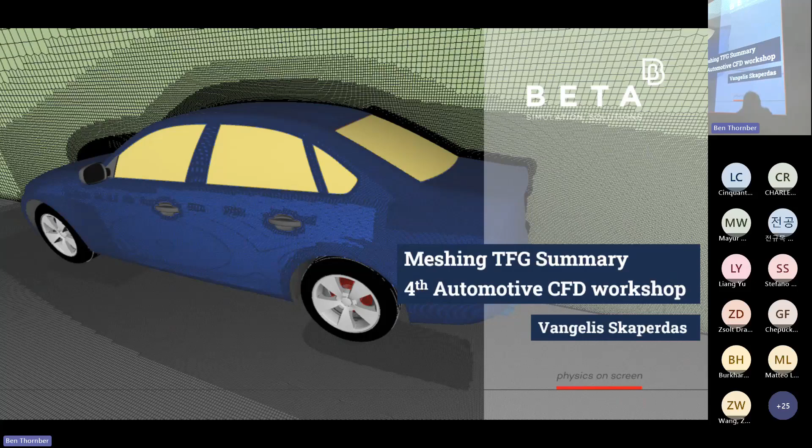I'm very excited to be here at the fourth Automotive CFD workshop taking place in a UK university, just like it started in 2019 at the University of Oxford. It brings me a lot of memories and flashbacks from my student life in the UK, so I'm very excited to be here.

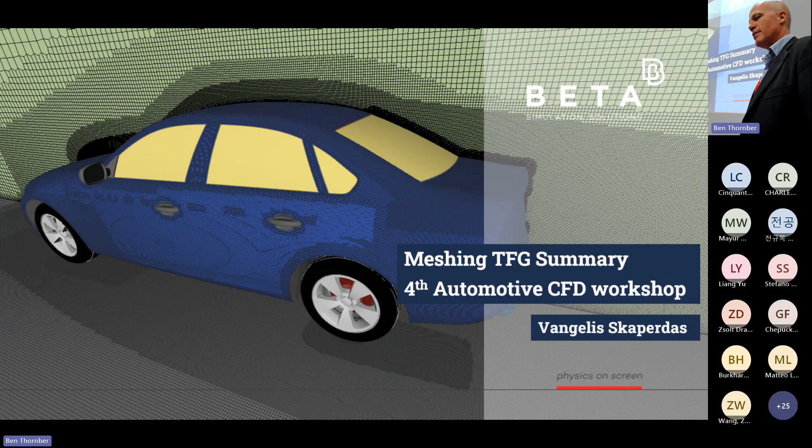So today I'm here to talk to you about the overview of the meshing TFG, and also about the committee meshes that we generated using ANSA. Disclaimer here, you probably know already that Beta is part of Cadence now. It's just that we didn't have time to get the correct PowerPoint templates. We will be given those in due time.

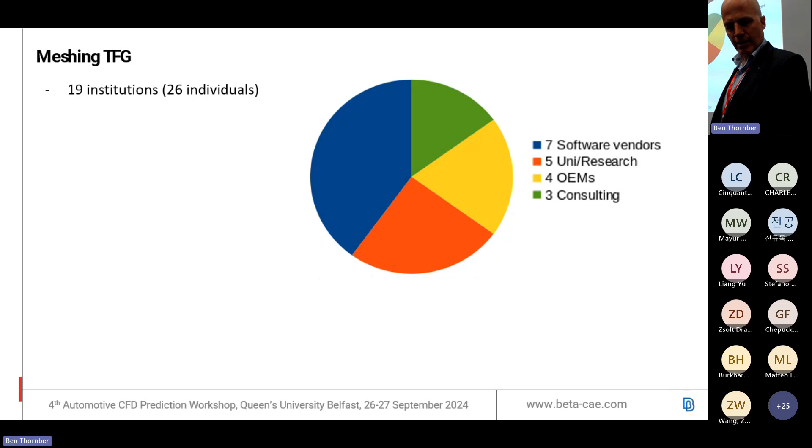So an overview of the meshing TFG. This is the number of participants, so a wide distribution over different fields - 26 individuals and 19 institutions. To be fair, I have to say these are all the people that just registered. The actual active participants were a bit less, but still they came from all over: software vendors, universities, OEMs, and consulting companies.

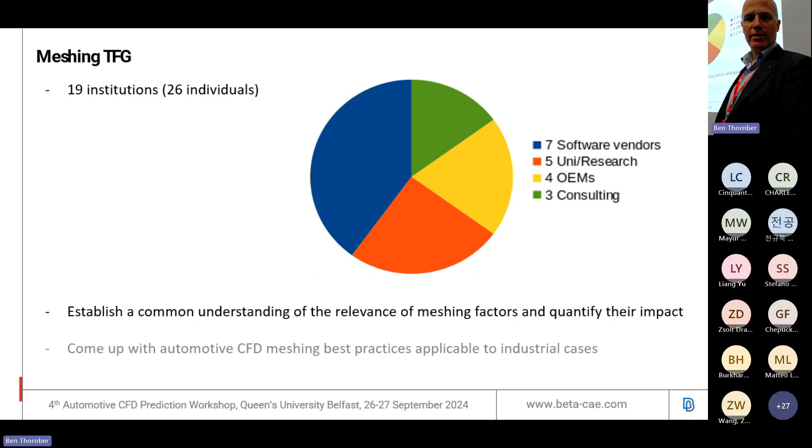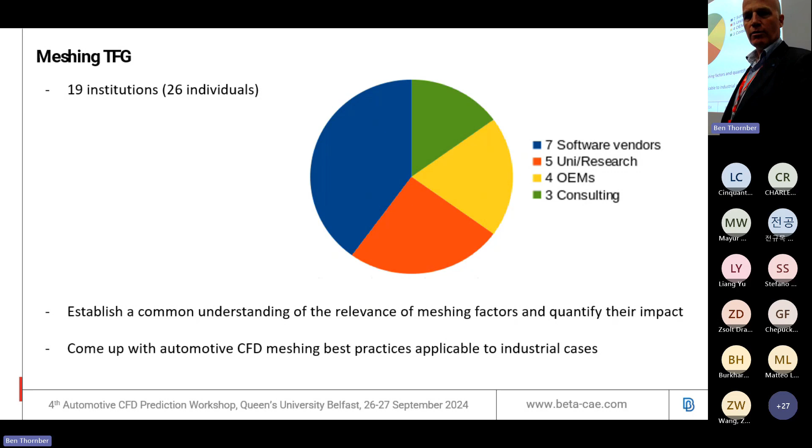The aim of the workshop was to establish a common understanding of the relevance of meshing factors and quantify their impact. This is a sentence that contains a lot of work, and I'm not here claiming that we showed the answers to all of these things. Once we did this, the purpose of this workshop is to come up with best practice for meshing that are applicable to industrial cases - this is the interest of the OEMs participating here.

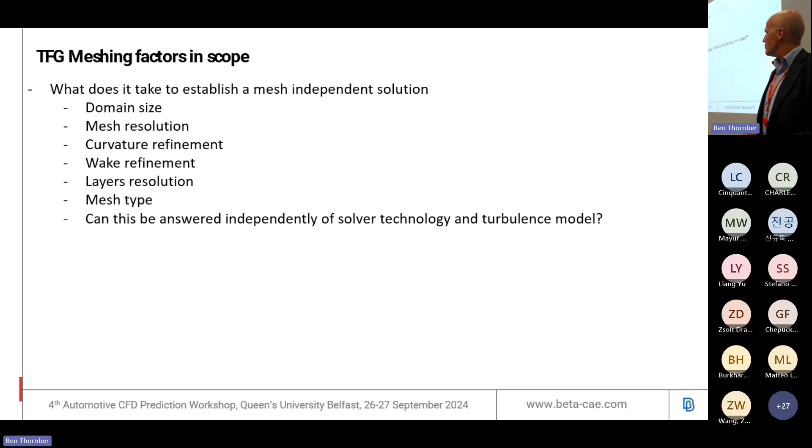Some of the topics discussed over the meetings, which took place every five weeks, included how to create a mesh-independent solution - features like domain size, mesh resolution, curvature refinement, wake refinement, layers, mesh type, polyhedral standard. And of course, is there a unique answer for all the problems? Probably not.

I also had in mind whether it was possible to create some sort of universal mesh quality criteria, because one of the challenges of creating the committee mesh is to make everybody happy. It's not easy because different CFD solvers have different peculiarities - different calculation of cell centers, face centers - and it's not always easy to have everyone happy. Another important topic, coupled with the noise TFG, was mesh consistency and repeatability, depending on the hardware, the actual geometry, and so on.

We also did additional work because the final meshes were polyhedral. In parallel, since some participants had solvers that used standard type meshes and high order meshes, we also generated some of these.

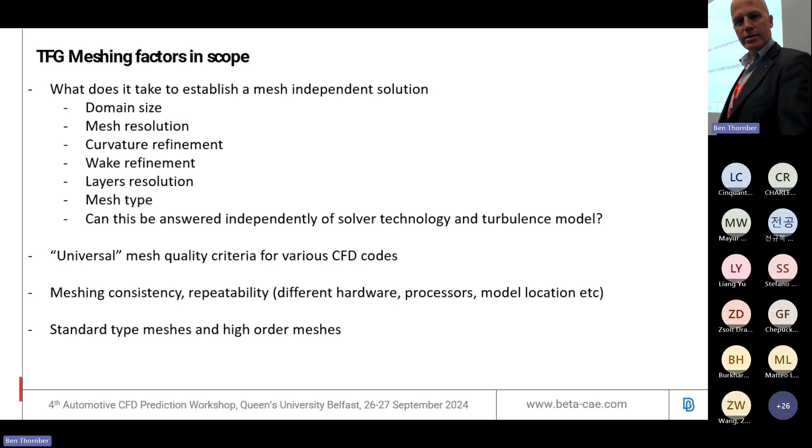Some questions that popped up in the meetings concerned the committee mesh, which is an octree mesh - the fact that it has this jump of cell size, one to eight in volume - and whether it causes any issues to hybrid RANS simulations. Some people discussed if we could have a coarser mesh, because there was only one mesh level refinement concluded from the previous workshop, but maybe that was a bit large in size.

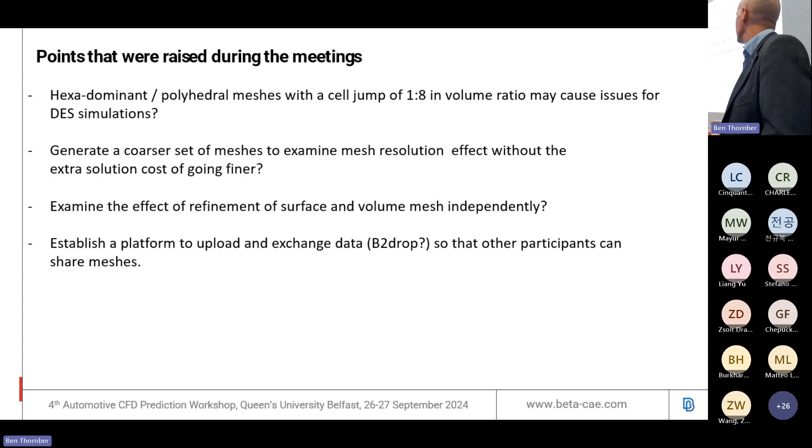We wanted also to examine the effect of changing the resolution separately on the surface and the volume, and see which one was most important. There was also a discussion on whether we could have a platform to exchange meshes so we could share some know-how. After all these discussions, there were bottlenecks.

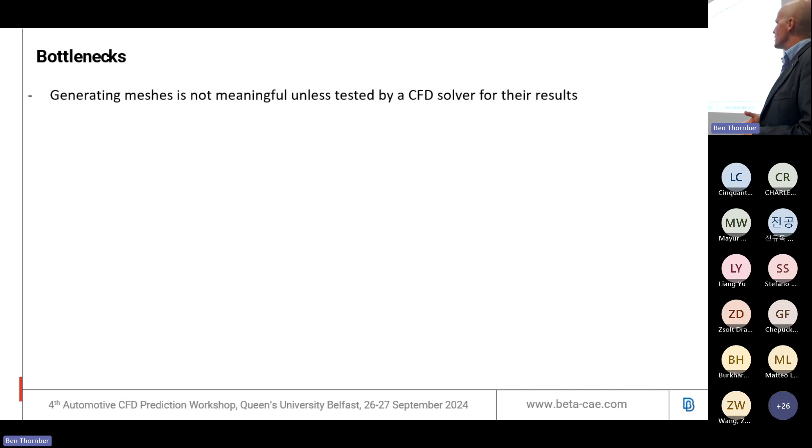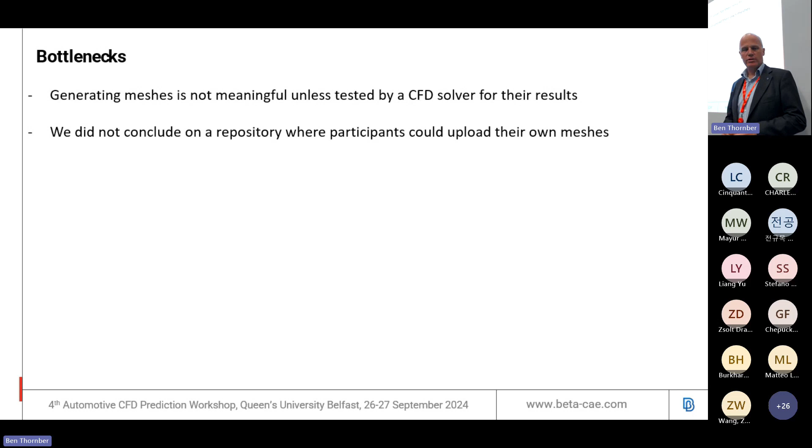One bottleneck is that generating meshes without solving them is useless, and it's always a matter of resources - everybody can generate a mesh, but somebody has to solve it and get some conclusions. Otherwise it's not useful. Everybody who has contributed actively in this workshop knows that this work is done overtime, in parallel to our everyday job. In the end, we didn't conclude on such a platform where we could share meshes and exchange know-how.

So the actual TFG outcome, I would say, is that we generated new committee meshes for cases 2A and 2B after very useful participant feedback, especially Burkhardt's team. I would also like to thank Miguel from Total Sim USA for his contribution.

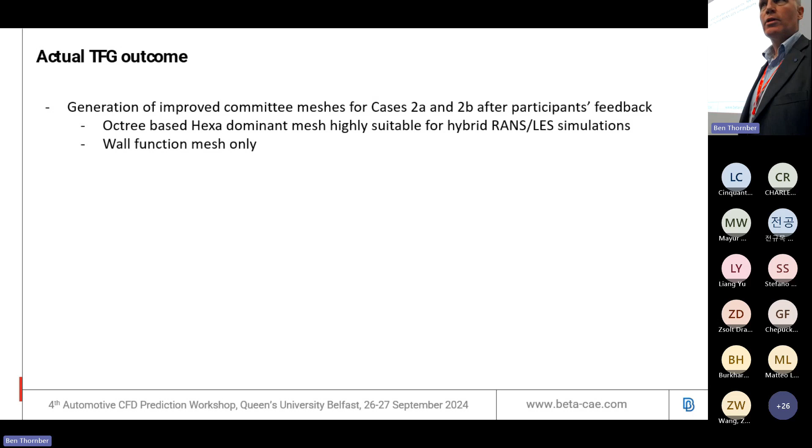These were, as I said, octree meshes, hex-dominant, highly suitable for hybrid RANS. Based on conclusions from previous workshops, we went only for wall function mesh because we saw there was no actual benefit to spending extra resources, and we output four mesh formats.

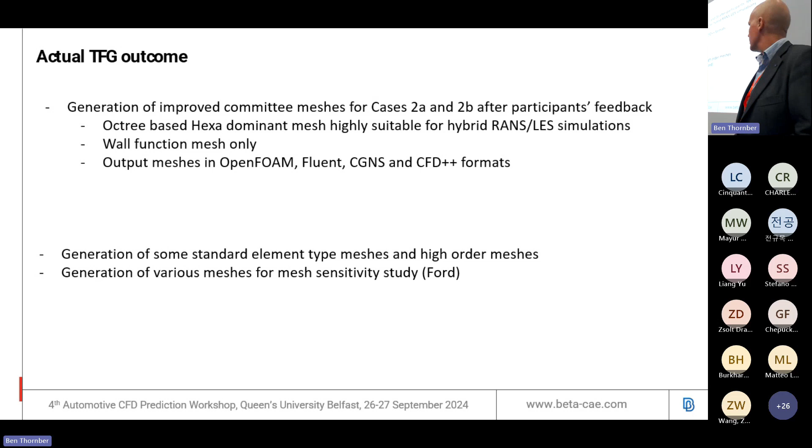As I said, we also generated some meshes with standard element type and high order meshes for some of the participants, as you will see. We did a lot of work in parallel with Ford on mesh sensitivity studies, as you will see in a very interesting presentation afterwards.

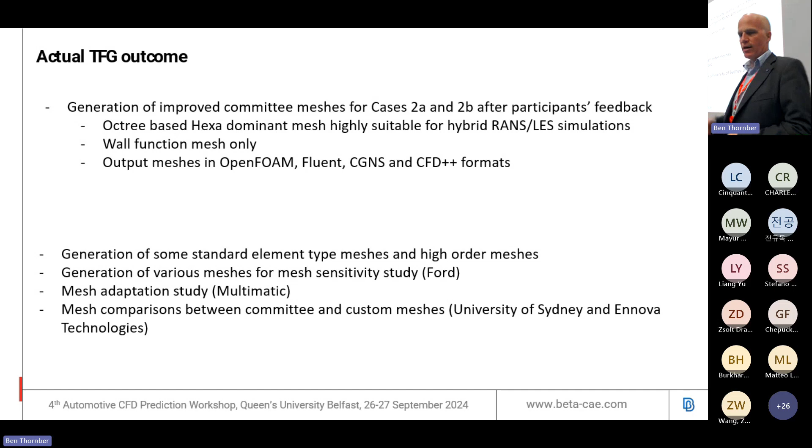Multimatic made a very nice presentation on mesh adaptation, and we also have work that compares the committee meshes with custom meshes. This is very interesting because what we actually wanted as our contribution was feedback - and feedback not only from OpenFOAM users, but from other users as well.

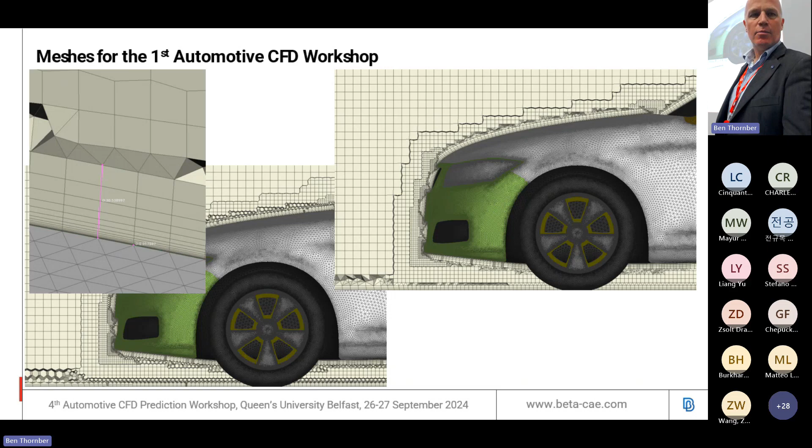Very briefly, we started providing committee meshes from the first Automotive CFD workshop. Back then we used traditional standard meshing - triangular surface mesh, layer extrusion, then filling up the volume. This created a buffer zone of pyramids and tetras, which could be converted to polyhedral. But in the second workshop we decided to go for an octree mesh for various reasons.

First of all, most OpenFOAM users prefer this kind of mesh because OpenFOAM was developed on such a mesh, like Snappy Hex Mesh. But also, the octree approach is more efficient.

It's much easier parallelized for speed up. Also in practice, the standard meshing approach requires a watertight surface. Even though the DrivAer geometry is a representative automotive geometry, it is very far from the actual complexity of a real automotive case.

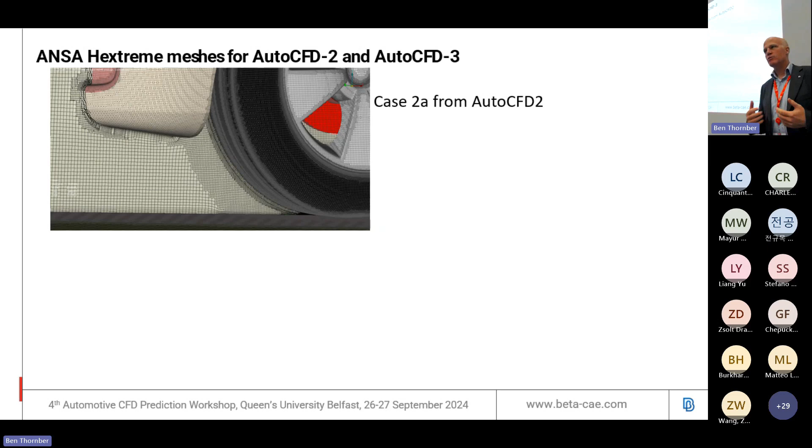And having a watertight surface is not as easy as one may think. Of course, one could use surface wrapping, but in my opinion, if you take the effort to set up an octree process that will generate a surface wrap, you might as well use it to create a whole volume mesh. So I think for automotive applications, the octree Hextreme approach is the best approach, and similar measures like that.

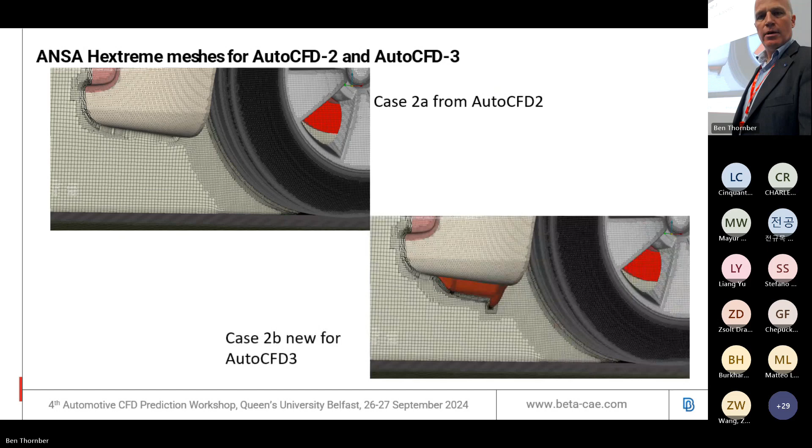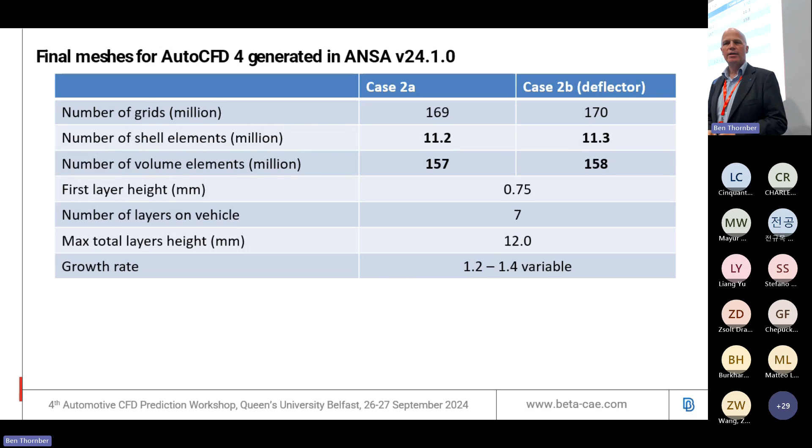Then for automotive CFD, AutoCFD3, we create a very similar mesh with the addition of the deflectors. And now we reached AutoCFD4, where in fact we created completely new meshes, updated, very similar to the ones before, but updated after the feedback of our participants.

These are some statistics: a wall function mesh, 7 layers, with around 157 million elements. The cell count was increased due to additional refinement, as I will show you. Some performance metrics: a meshing speed of 157 million cells per hour, and around 1 gigabyte of memory usage per million cells.

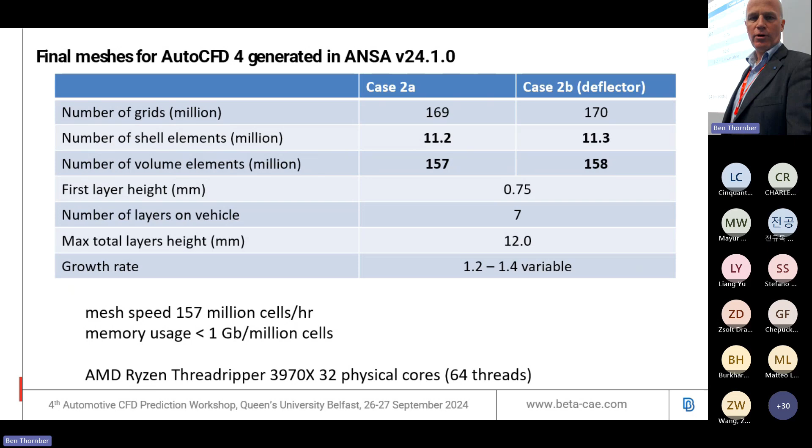So the meshing approach starts from a tessellated geometry, where we define these so-called size boxes to refine the overall area around the car. And here we can see a preview of the mesh refinement in a color plot.

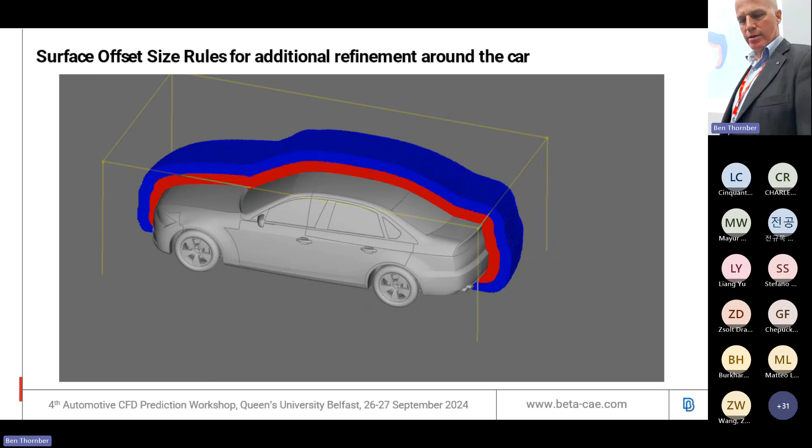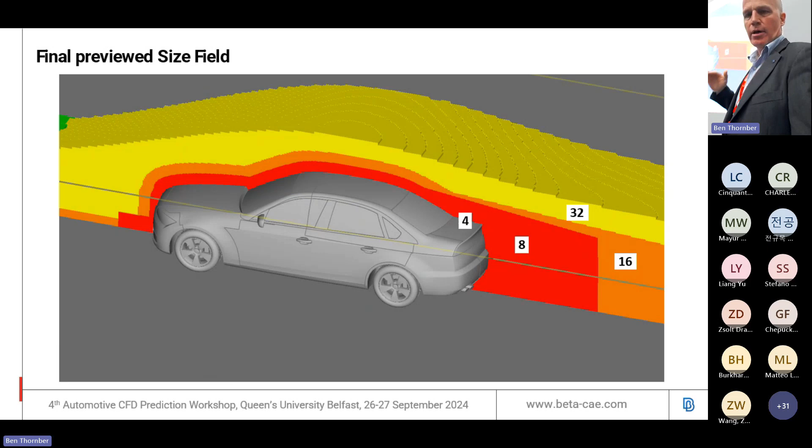Then we add some additional sizing rules like surface offset or surface offset and sweep to refine the wake. And then we have a total size field that is distributed like that, where you can see the element length of every octree level. This creates a very nice refinement zone.

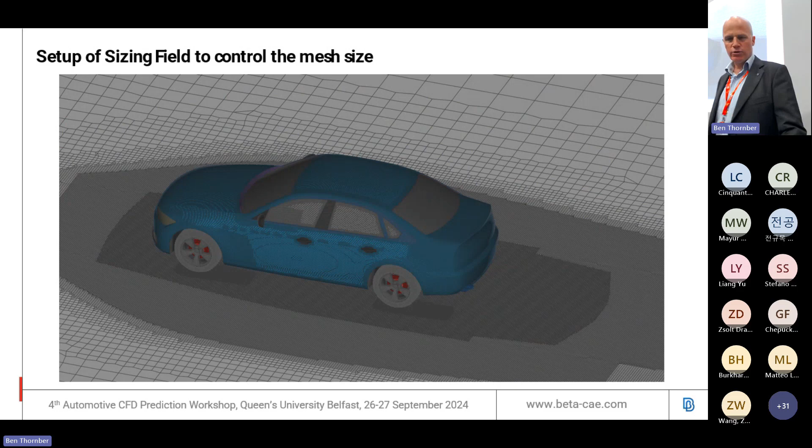I would say we may have overdone it here, but just to be sure that nobody has any issues, we wanted to refine further the layers on the road. And this is the resulting volume mesh.

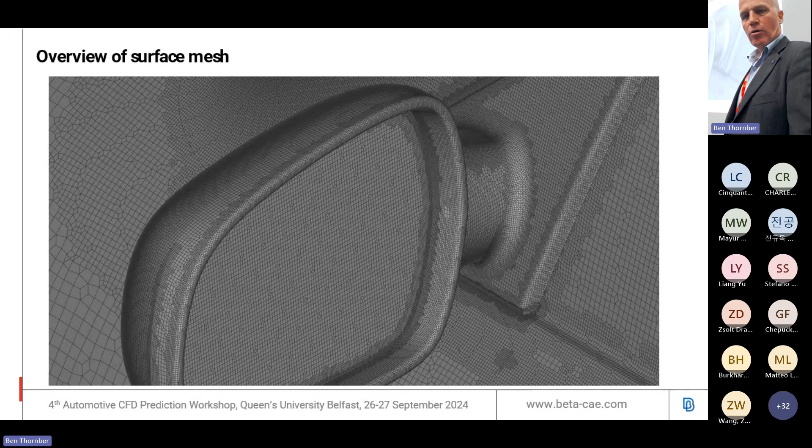As I said, the Hextreme meshing approach is a very efficient approach, and the most challenging thing is to be able to not sacrifice on quality. We believe that our algorithm creates a very nice feature capturing. It resolves all the features without missing feature lines, curvatures, and proximities.

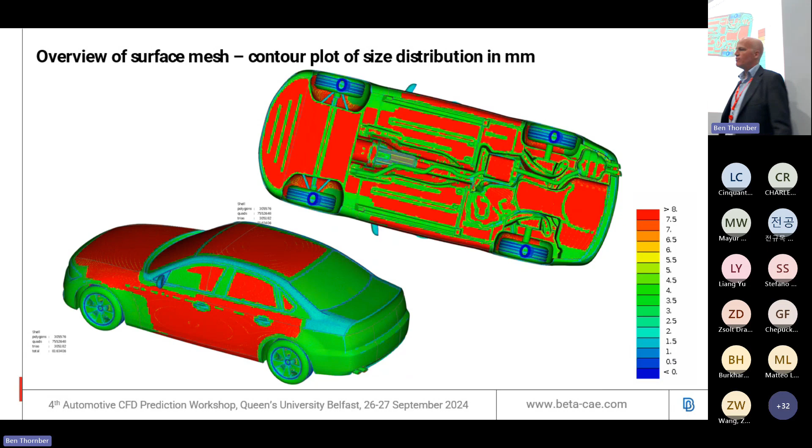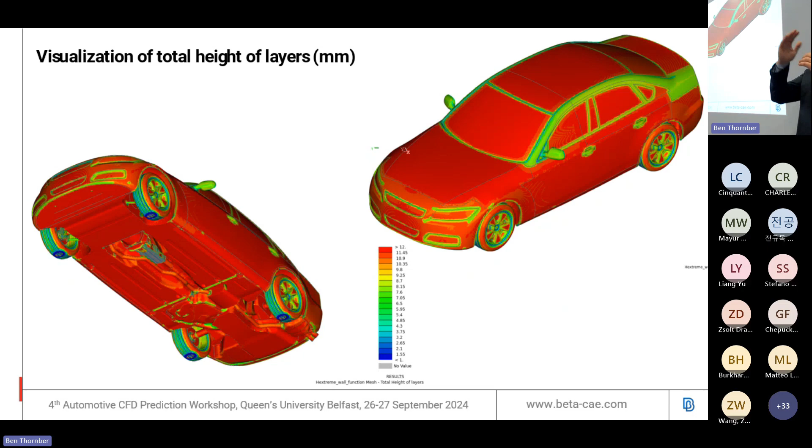As for layer coverage, it's very robust. We generate 7 layers almost all around the vehicle, and the distribution of the total boundary layer height is around 12 millimeters. Some areas that you see smaller is because the element length is so small that the layers do not want to inflate by more than the average element length in that area.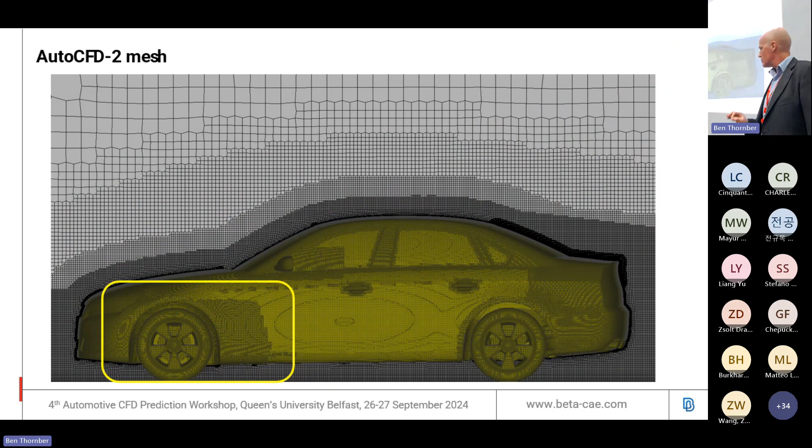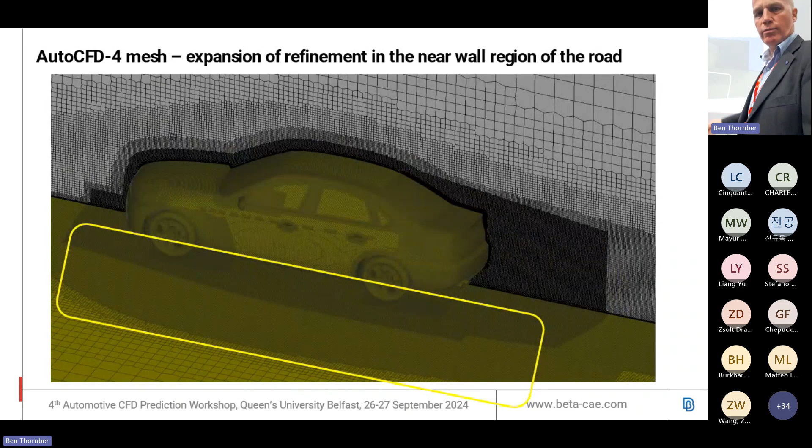The changes with respect to the AutoCFD2 mesh follow a very similar approach, just a few things were changed. We increased the refinement around the wheels, we increased the refinement on the surface of the road, and we increased the refinement on some curvatures, like the ceiling of the rear window here.

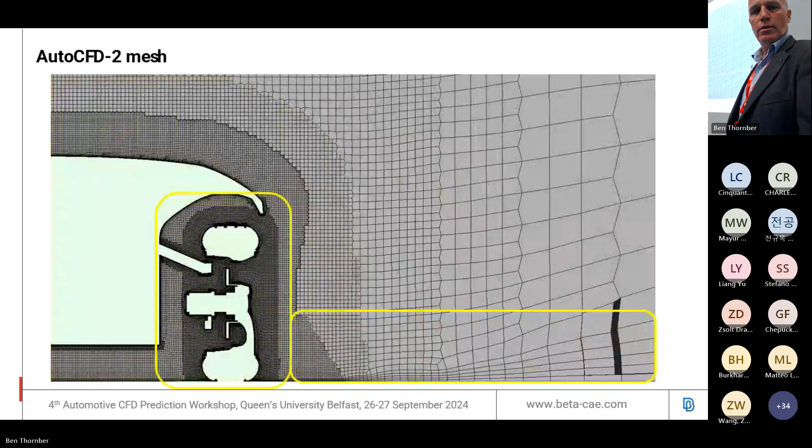We wanted to capture the curvature in a much finer way to avoid any noise in the flow simulation. You can see the effect on the volume mesh here, with the increase in refinement around the wheel and also on the layers near the wall.

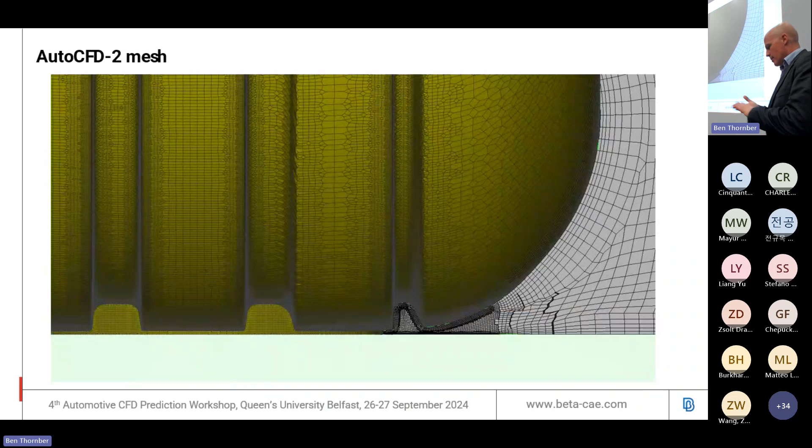Another thing that is also important, as you will see in the following presentations, is that the original geometry had a closed plinth at the contact patch of the tire. For AutoCFD4, we opened it because, again, we wanted to make sure that we are as close to the experiment as possible.

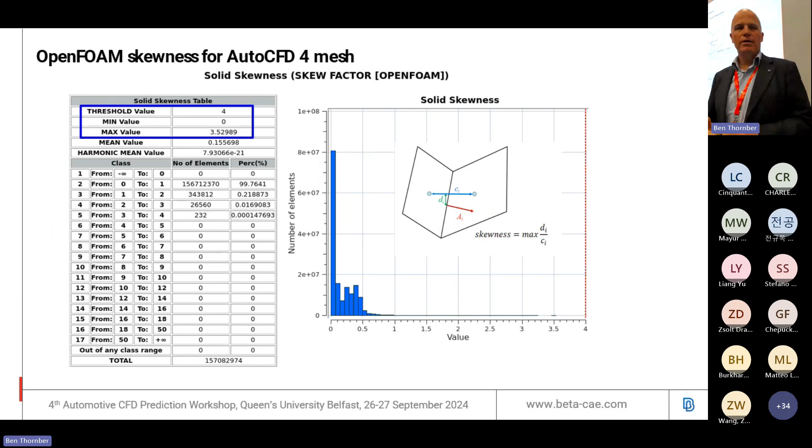Regarding mesh quality, we believe that we have improved further the mesh quality. Again, our target values always follow OpenFOAM quality criteria, so you can see that the maximum skewness is below the limit, around 3.5, and the orthogonality is just exactly at the limit of 70.

And the growth rate is very nice. There is a peak here at the octree transitions, and the maximum is below 50, which should be okay.

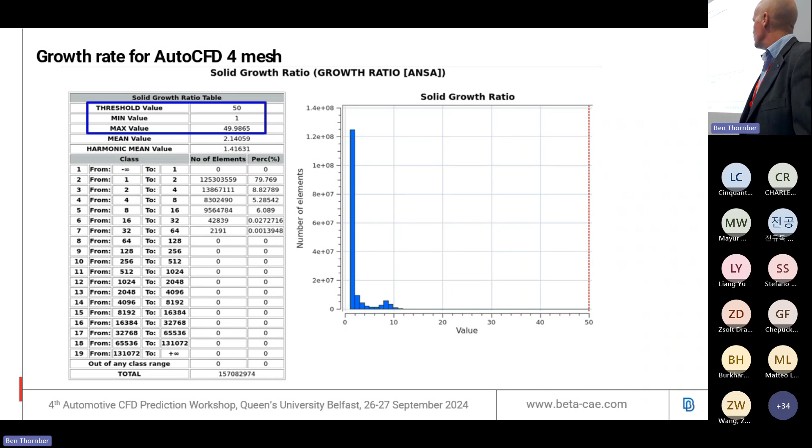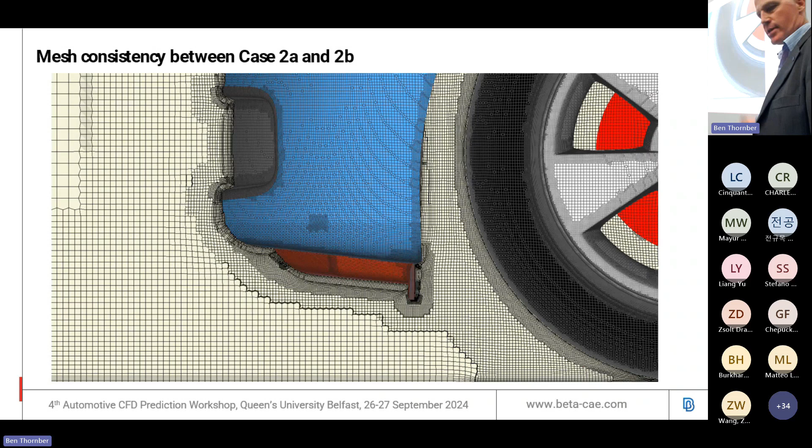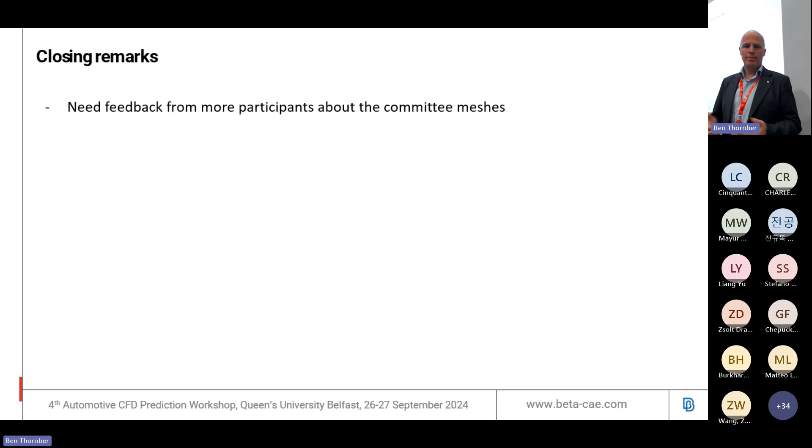With that, I would like to conclude and say that we would be very interested to have feedback from more participants on the committee meshes. As I said, we did our best always for OpenFOAM quality, but even for other quality criteria. Although we had a lot of feedback from OpenFOAM users, we didn't have feedback from non-OpenFOAM users, and we would be interested in that.

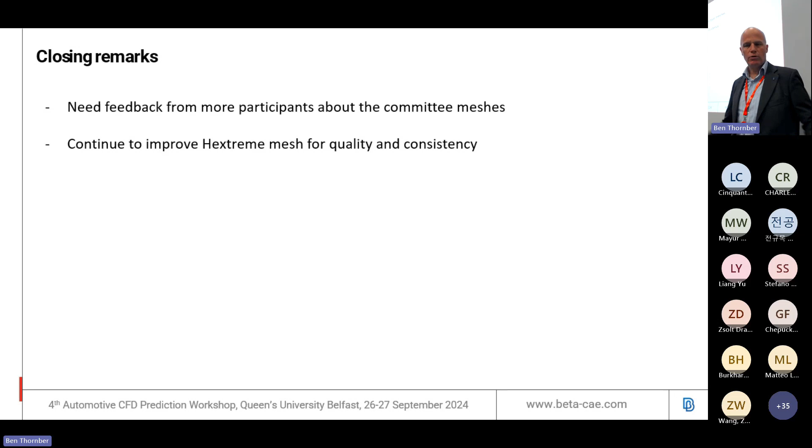We have continued to make improvements in our algorithm. So now with the latest ANSA version 25, we have much better quality, and also we have dropped the total cell count, leading to smaller meshes that are faster to run.

I think tomorrow afternoon, where we have the panel session, we should discuss again the meshing TFG objectives together with everyone. It was a very interesting experiment. I think it went very well for all TFGs, but we need to reconsider what are the aims and what we can expect from a meshing TFG, especially given the workload that everybody has.

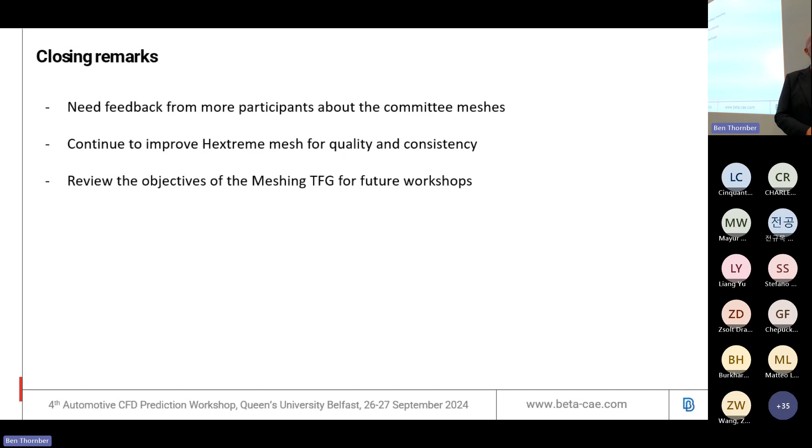With that, I think I can conclude. We can continue with the actual presentations. Thank you.